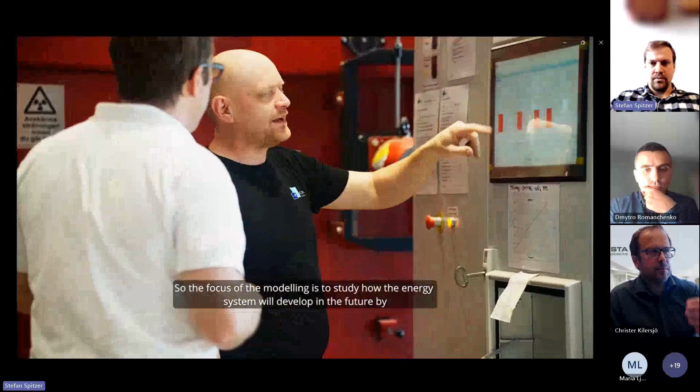We from IVL Swedish Environmental Research Institute contribute to the ENFLATE project by studying long-term development of energy systems. In particular, we focus on flexibility issues and synergies between the district heating and electricity sector. In this project, we develop and apply an energy system optimization model, which we then apply to the demo site, the actual Fjärås area. The focus of the modeling is to study how the energy system will develop in the future by taking advantage of all the flexibility resources available here. We do this with the objective of scaling up the modeling to other cities and regions in Sweden and abroad. In addition, the modeling results will help local decision makers, for example the local district heating company, to make long-term sustainable investment decisions so that we reach the goal of climate neutrality together and in good time.

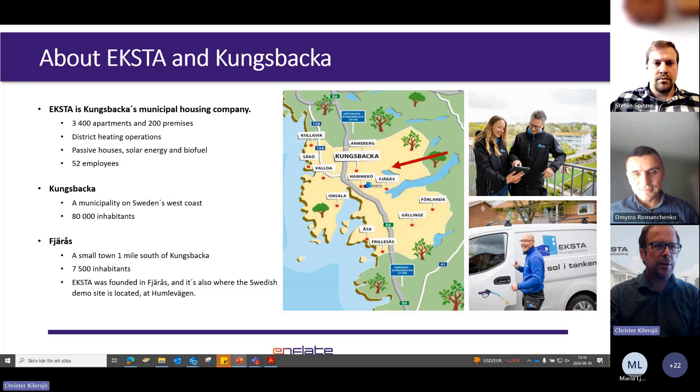This demo site at Humlevägen in Fjärås is a mix of normal apartments. You see these 4 buildings built as passive houses, and we have this substation in the middle. I'll come back to that later.

We have a retirement home, group housing, preschool, and a property office for our own employees and maintenance people. You can also see the biomass plant called Ögärdet, which delivers district heating to the whole Fjärås network that Dima is going to tell a little bit more about later.

What's a bit special here at Humlevägen is that we have our own microgrid. All the buildings are connected to a microgrid electricity network, so we can move the solar energy from building to building when the demand is different during the day. That's quite unique in Sweden.

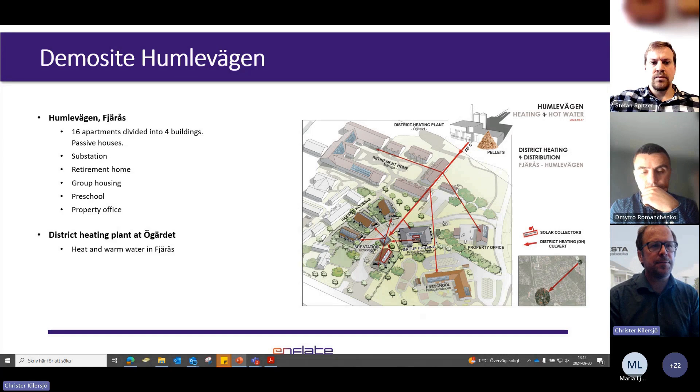In this particular project, the substation here is actually the heart of the area. From the beginning it was just a substation for district heating, but now the microgrid is also run from the substation.

So, as I said in the movie, for us this is about optimizing the energy. We have solar energy, electricity, district heating, and we like to optimize: what kind of energy production is best at any given time?

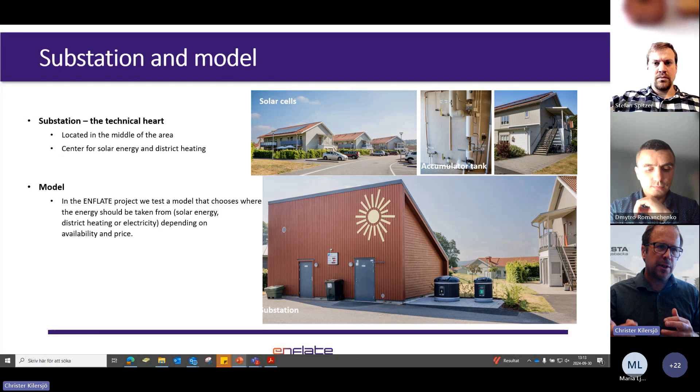Is it best to run it with electricity when the price is low? When there's lots of sun, we use the solar collectors and the PVs, and otherwise the district heating.

So we installed an electric boiler connected to this big water tank. It was installed, I think, in the middle of winter, and it took a lot of time and lots of tests to make it work.

Now it's set up so that if the electricity price is low, we set it to maybe 50. If the price is low, the electric boiler switches on and heats up the tank with hot water.

If the price is high, the district heating warms up the tank, and if it's a sunny day, the solar collector warms up the tank. And if everything is maximized, we also send heat out to the district heating network.

So this substation is now actually a part of the energy system, producing energy out to the district heating network.

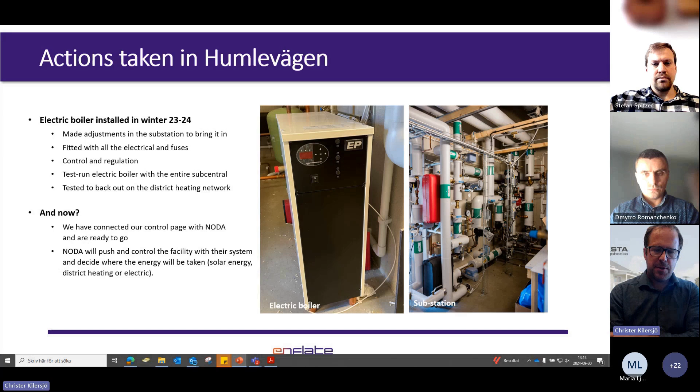That was one of the most technical things, but something very important for us is how we can engage our tenants to be part of making this project work. If we can get tenants to shift their consumption of electricity or district heating during the day, it benefits us a lot.

We got 14 of 16 households involved in this. They got a text message the day before — let's look at this example — saying: tomorrow between such and such times, can you use electricity at other times, and we'd see if that changed their behavior.

They didn't benefit anything directly from this, it was just to help them understand that the electricity price goes up and down a lot during the day. This project was done by a student from Stockholm University, Isa Diamant, on nudging for flexibility.

I think maybe Dima can show it — you can read her results somewhere in this ENFLATE project.

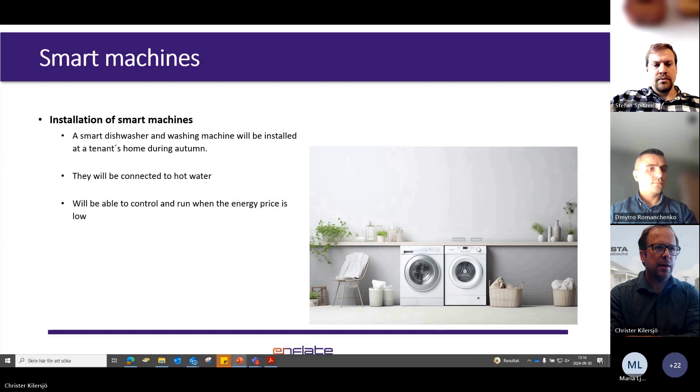And I think that was my last slide. We'll take the questions at the end, I think, so we'll summarize together with Dima and Nico. Should you, Nico, share the screen, or should I continue? Yeah, thank you for that, Christer. I'll go ahead and share. So now it's yours. There we go.

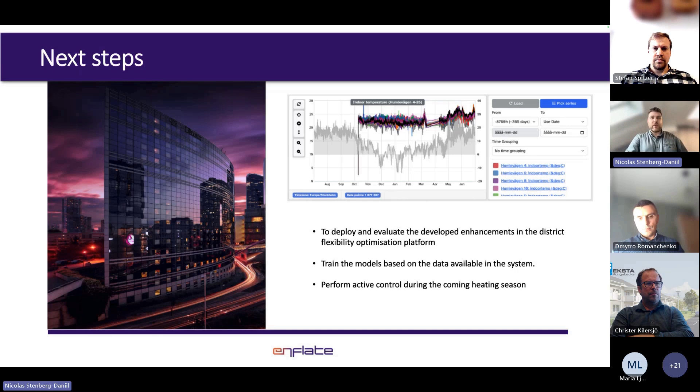So next steps in our platform and in the ENFLATE project will be to deploy and evaluate the developed enhancements in the district flexibility optimization platform, train the models on the data available in the system, and perform active control during the coming heating season.

So that is what we have in our time. Thank you for that. Questions will be summarized at the end. Thank you. Thanks a lot. That was quicker than we thought. But yeah, so the next speaker is going to be Dmytro right away.

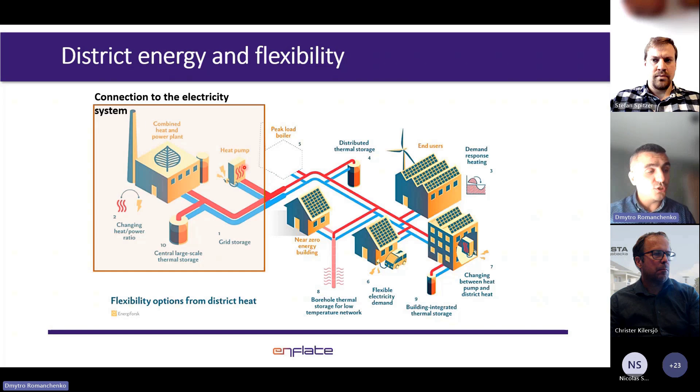Having talked a little bit about district energy and flexibility, now the objectives of the work we do as a research institute. Again, we are trying to focus on long-term development of the studied energy system, and that is the Fjärås energy system, or district energy system of Fjärås.

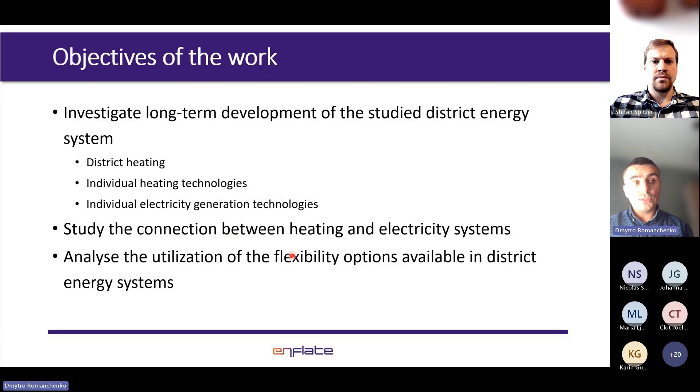We are looking at district heating technologies, individual technologies, and the competition between them. But the sub-focus here is that we are studying, as said, this connection between heating and electricity, and how these flexibility options that we have in the system, or that we could have in the system, could support the system itself and the surrounding electrical grid.

So let's spend a minute on this specific slide. We are working with a specific software, called TIMES Optimization Modeling. TIMES is a tool to create energy system optimization models. So what it constitutes is the following: we start by representing our existing energy system, which we call the reference energy system.

By that, we mean that we include in the model a certain number of demands. In this case, it can be heat and electricity. So we represent the demand in the system in the model, and we represent the existing heat and electricity generation units within the system we study.

So basically within the district energy system of Fjärås, what we do next is include the time horizon of up to 2050. So we are studying the system in the long term. We want to understand how these demands in the system will be satisfied in the future, not only today. But this poses another problem: we know that some of the existing heat and electricity generation technologies will become too old and we will need to phase them out someday in the future. So for the model, it means that we will need to reinvest in other technologies in order to supply the demand.

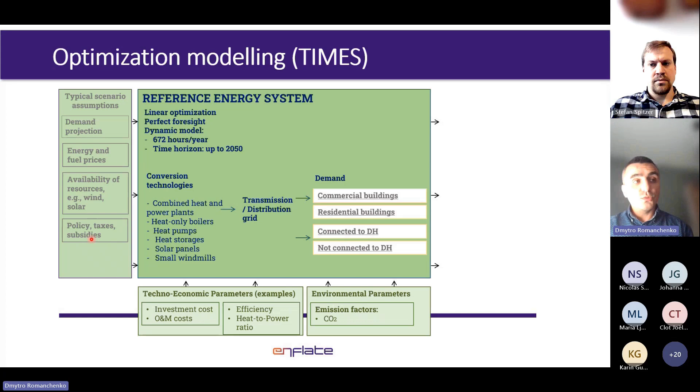So what we get at the end is the ability to study the development of the said energy system into the future. We will be able to see which new capacities the model wants to invest in or doesn't want to invest in. The model will provide a cost-optimal solution to the problem, so we will find investments that bring the lowest possible cost to the system. We will also be able to see the utilization of fuel, how much energy was generated each year and even within a year - I'll come back to that - and we will see the respective costs of running such a system, not only investment costs but also the running costs of the energy system in Fjärås.

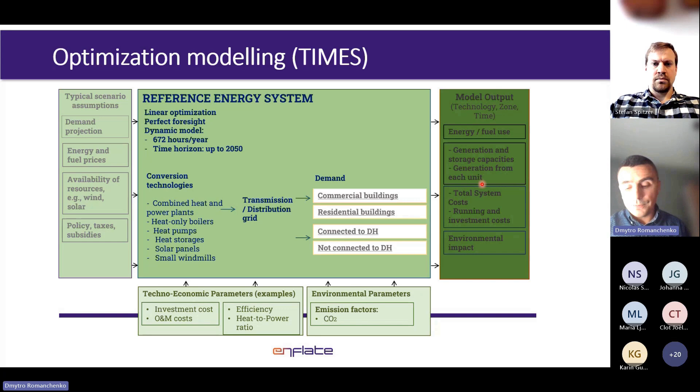So this is schematically how the model will function. Now let's try to understand what is included in the specific model we developed and applied to Fjärås.

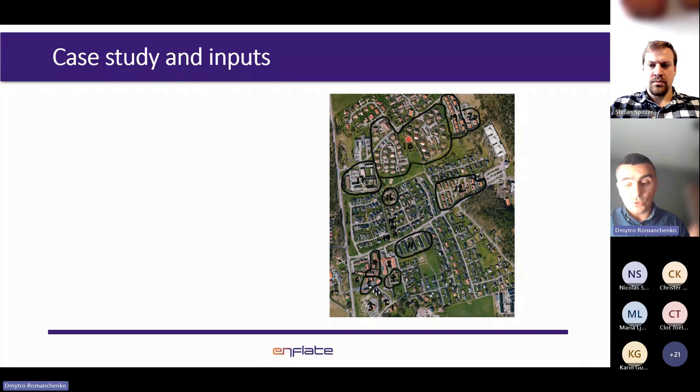In contrast to what Christer and Nico were mentioning, the actual practical demo site implementations are focused on this cluster here, which is the number of practical existing buildings where we test physical stuff. But for our optimization modeling, we needed to include more buildings, because if we want to optimize the supply of energy, we also need to represent all the demands of such energy. That's why we included other buildings owned by Eksta which have district heating as a main source of heating, and we also included external consumers - buildings not owned by Eksta but that consume district heat in the area.

So long story short, if you translate this picture into these schematics, right now in the model we have 21 archetypical or representative buildings which are consuming electricity and heat. And in the model we show their networks which are providing these energy carriers, and also the main sources of heat and electricity in terms of generation capacities. And we also included the storages.

So long story short, the model can choose what is the best source of heating, for example, at the address of Humlevägen, and the model can choose between locally produced solar heat or taking heat from the district heating network. So that's already a competition between sources here, and other buildings also have either one source or a couple of sources of heat and electricity. So that is an existing system that will later evolve into something new, and soon I will show the results of the modeling.

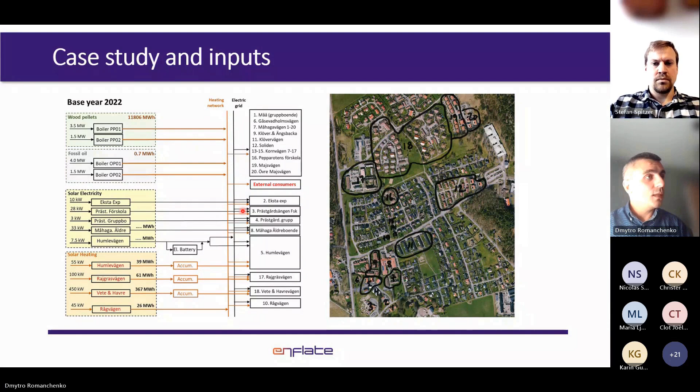Before we come to the results, this is very important specifically for the ENFLATE project: we needed to make a number of assumptions about fuel prices or demands on the so-called sub-annual level - not only the energy demand as one number per year, but also what is happening between the hours of the year. For that reason, we collected information about the heating demand profile of all these representative buildings included in the model, and presented it by having one week from each season representing the whole year.

We are representing the whole year using 4 weeks, one from each season, and each of these weeks has hourly time resolution. So we have 672 hours in each modeled year.

This will be schematically our winter time with the demand during winter, and this will be spring, summer, and autumn respectively.

In addition to the heat demand profiles, we also have electricity demand profiles. If you look closer, these are different types of buildings, because some have demand during their evening time and some have demand during the first part of the day. This is very important, as we can study different behaviors of buildings.

One of our main assumptions is the future electricity prices, which of course we don't know how large or how fluctuating they will be in the future, but we can test different profiles. That's why we are doing the modeling. So these are the assumptions we have in the model as of now.

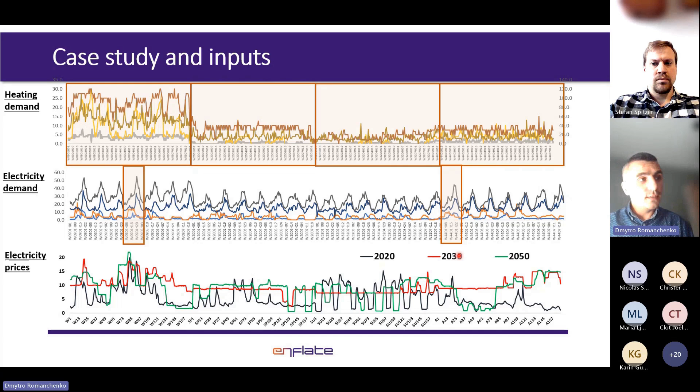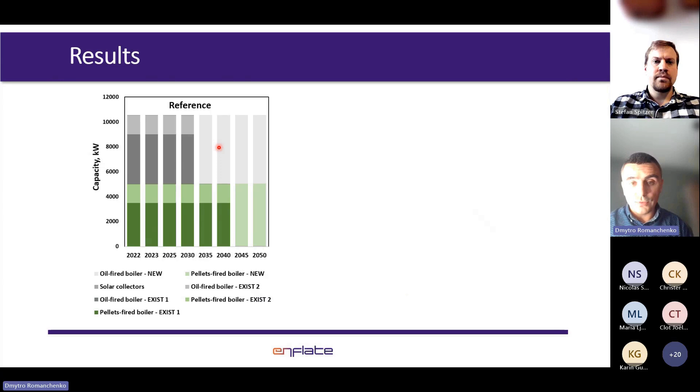What will happen if we continue to produce heat in the area as we did before, as we do now? This is how it will look. But when we let the model make an investment on its own, making it free, this is the result we get.

Again, we see phasing out of the existing technologies by 2030, and another step of phasing out in 2040. The model suggests an alternative optimized solution: it says it would be cost optimal to invest in some capacity using biogas to provide peak capacity in the system. But as we lose more existing heat generation technologies, the model wants to invest in other types of generation, a heat pump using outdoor air as a source, and a wood chips boiler.

We also have capacities which are smaller than nowadays. That also means a lower total capacity in the system will be able to supply the peak demand even during the coldest winter days. So we can also save a little bit in terms of capacity.

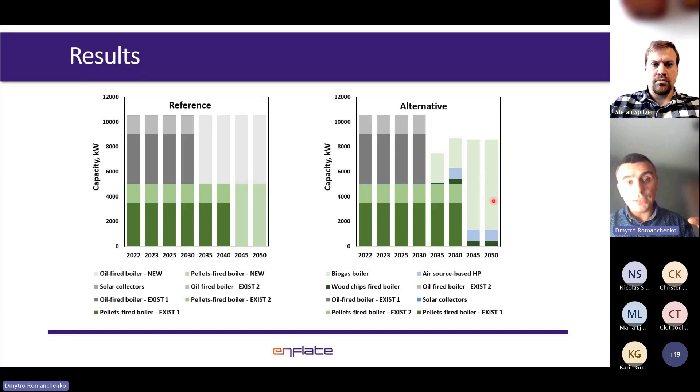However, the interesting point is, how do we actually operate these new capacities in the future? Do we really use a lot of biogas, as shown in the capacity figure? Again, this is only the capacity installed. Now we will check how much energy, or how much heat, we are producing from these boilers.

Historically, and in this reference case, we see that mainly we use biopellets in the system to generate heat, while other types of boilers only serve for a short period each year. But in the alternative case, we remember the model suggested investing in a lot of capacity using biogas. However, it does not suggest using a lot of biogas.

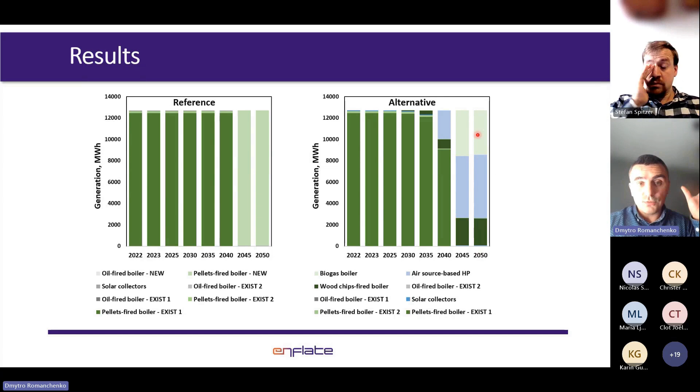Even the smaller capacity of heat pumps will be generating most of the heat in the future. So we are seeing a nice combination of different technologies which could provide the same amount of heat in the future, but using the optimum points in time to run them.

Again, this is a nice combination from the point of view of coupling it to the electricity grid, because the heat pump is a technology that utilizes electricity to produce heat. That means we can use low price hours of electricity to run heat pumps and produce heat locally.

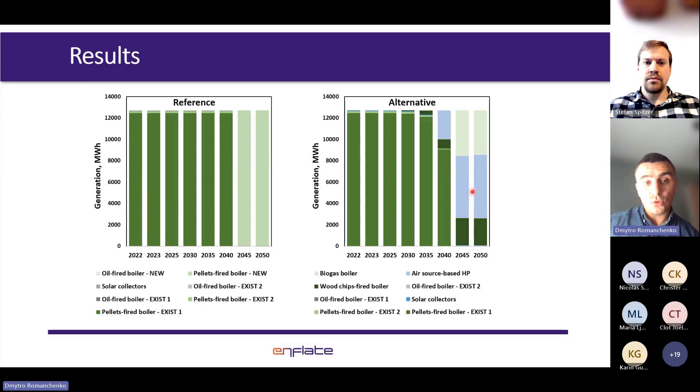Finally, this will be one of my last slides. We can also check what is happening in each hour that we are using in the system. So in our base year, we are seeing that between hours, this is how we want to optimize operation of our technologies, mainly pellet boilers and a little bit of solar collectors.

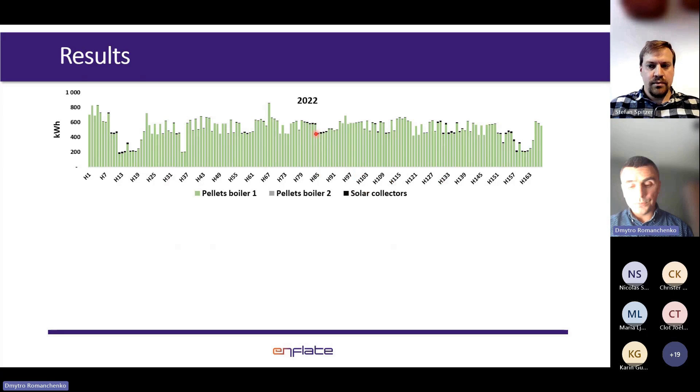But when we look at our alternative scenario with the assumed year of 2050, we can see that the model sees these dips in electricity prices and tries to optimize our wood chips boilers and heat pumps in accordance with the electricity price.

So when the price of electricity is lower, I guess this will be the best example: during the low price periods, we are using our heat pumps at maximum. But when the electricity price goes higher, we try to use wood chips at their rated capacity and then follow our demand for heating using our heat pumps.

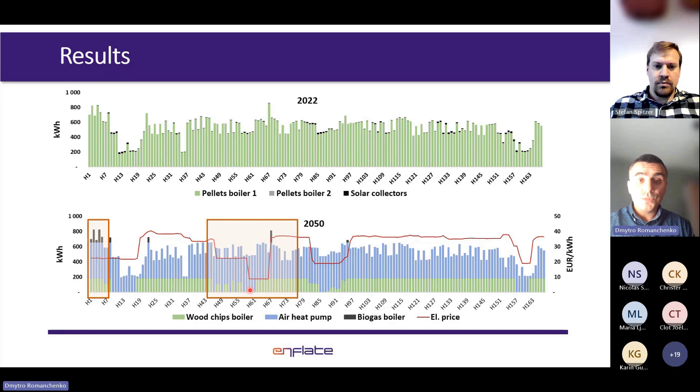So basically, the conclusion is with high electricity prices, we are maximizing the output of wood chips. With lower electricity prices, we are temporarily shutting down our wood chips units and running the heat pumps in order to benefit from these electricity prices.

Let's get to some of the outcomes. So we have developed a TIMES model and applied it to the area of Eros. We did test the long-term system development of the system. We can say that the future tells us it will be nice to interconnect electrical and heating systems of the area more, by installing at least heat pumps in order to create a coupling between electricity and heat.

And that is another solution we are seeing, but I didn't have time to show today, that our existing solar panels and storages are also used to provide flexibility.

But in the future, we want to add to the model new options, such as investments in small-scale electricity and heat generation. So we will also see the competition not only between district heating technologies in itself, but district heating versus individual technologies. And we want to test new investments in heat and electricity storages.

Finally, in the project, we will also run multiple scenarios, as the one we showed today that was the base and one alternative scenario, but we want to test different prices and different technologies in the future, so we will create a plethora of different scenarios.

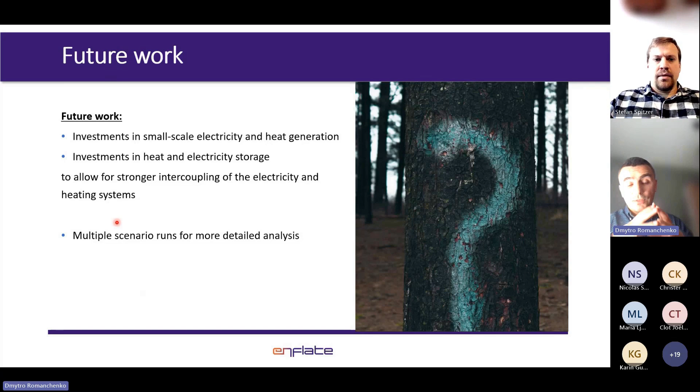Yeah, I think I will also stop here, and we are now 40 minutes into the webinar.